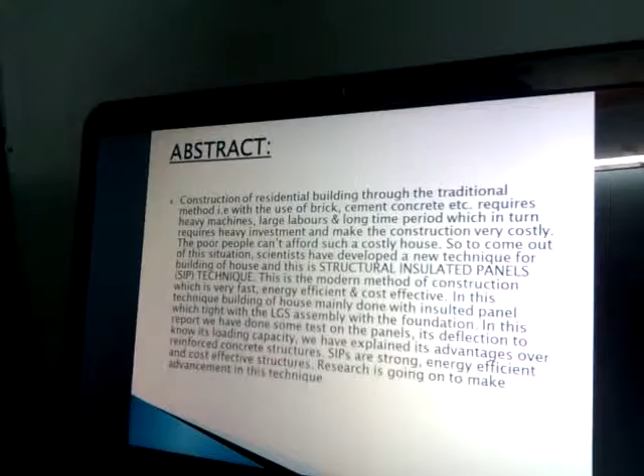This is the abstract. Construction of residential buildings using the traditional method with brick, cement, concrete, etc. requires heavy machines, large labor, and a long time period, which in turn requires heavy investment and makes construction very costly. Poor people can't afford such costly houses, but rich people can. For the betterment of this situation, there is a new technique, the Structural Insulated Panel System, which is very fast, energy efficient, and cost effective.

In this technique, the building of a house is mainly done with insulated panels, tied with an LGS assembly to the foundations. In this report, we have done some tests on the panels and their deflections to know their loading capacity. We have also explained its advantages over reinforced concrete structures. SIPs are strong, energy efficient, and cost effective structures. Research is going on to make advancements in this technique.

This is the company profile. Composite Technology Park is situated in Bangalore. It is a society for developing composites, incorporated in 2003 as a registered R&D society, supported by the Department of Science and Technology, Building Materials and Promotion Councils, Department of Housing, Coir Board, Government of India. This also includes construction of a structural insulated panels house.

This company is run under the Executive Director, Dr. R. Gopalan, who is Company Executive Director and CEO.

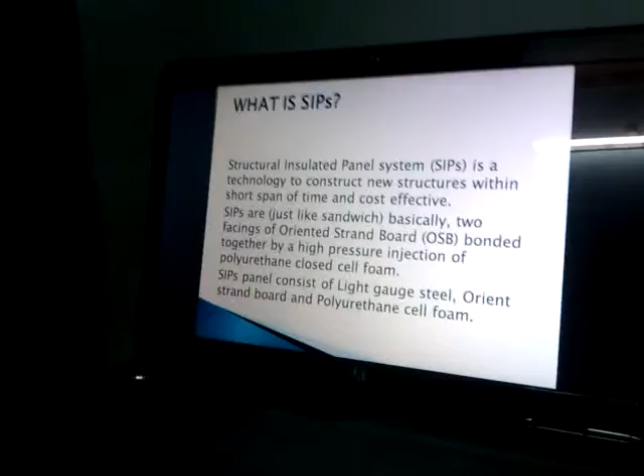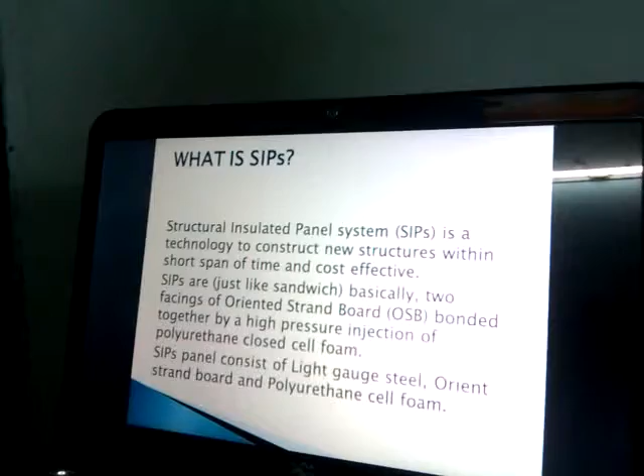First of all, let's know what SIP is. SIP is nothing but Structural Insulated Panel System. It is a technology to construct new structures within a short span of time and cost effectively. SIP basically consists of two facings of oriented strand board bonded together by a high pressure injection of polyurethane closed cell foam. It also consists of light gauge steel, oriented strand board, and polyurethane cell foam.

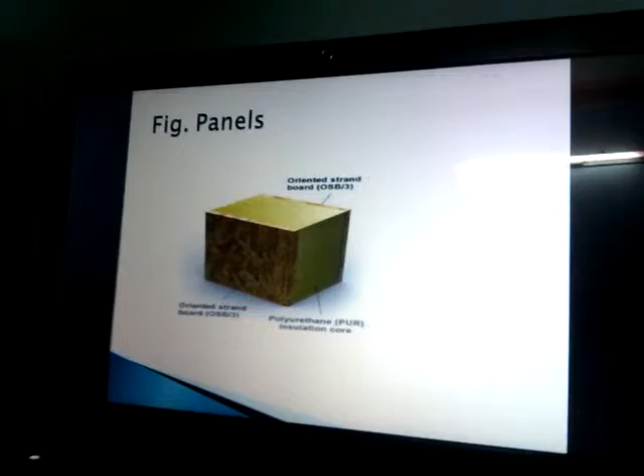You are viewing these diagrams of the structural insulated panel system. This is the panel, this is the OSB board, this is the PUR foam, and this is bonded together by an adhesive.

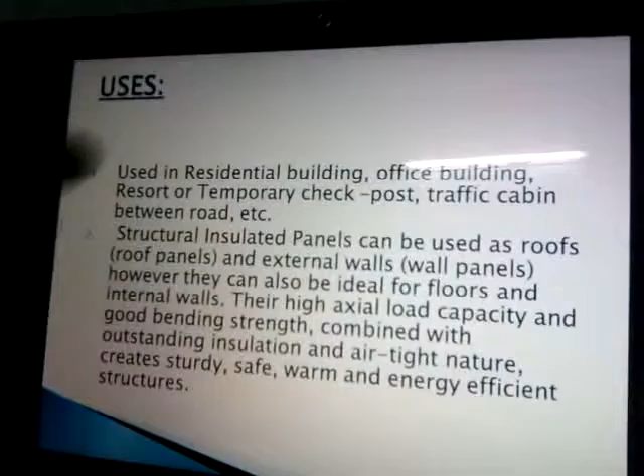Its usage is in residential buildings, office buildings, resorts, temporary checkposts, or traffic cabins between roads, etc. It is mainly used as roof and external walls. However, it can also be ideal for floors and internal walls.

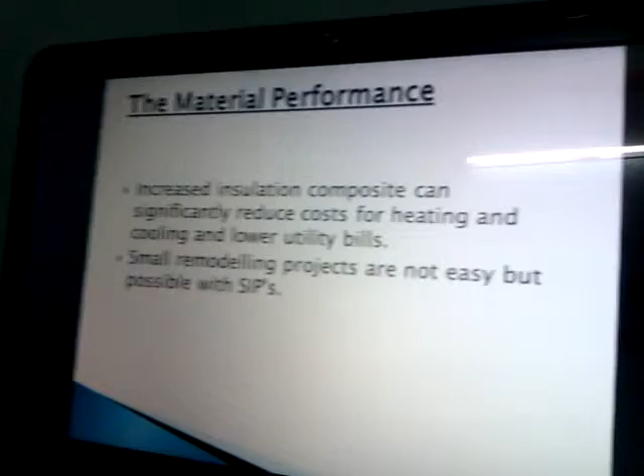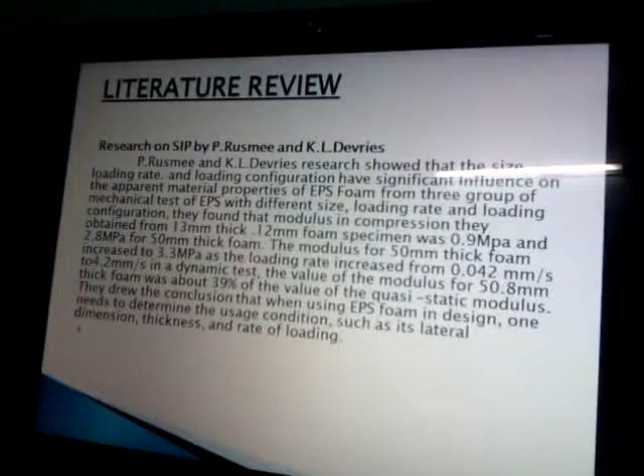Structural insulated panel materials performance: increased insulation composite can significantly reduce costs for heating and cooling and lower utility bills. This is from the literature review research given by P. Rusmee and K.L. Devries.

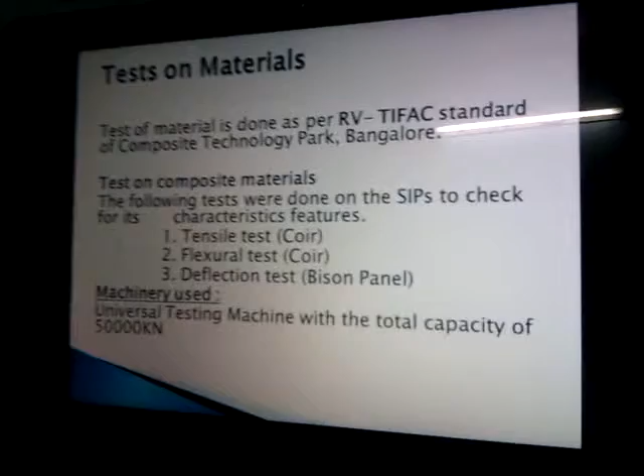Test of material is done as per RV-TIFAC standard of Composite Technology Park, Bangalore. The following tests were conducted on the SIPs to check its characteristic features, such as tensile tests, flexural test, and deflection test of Bison panels.

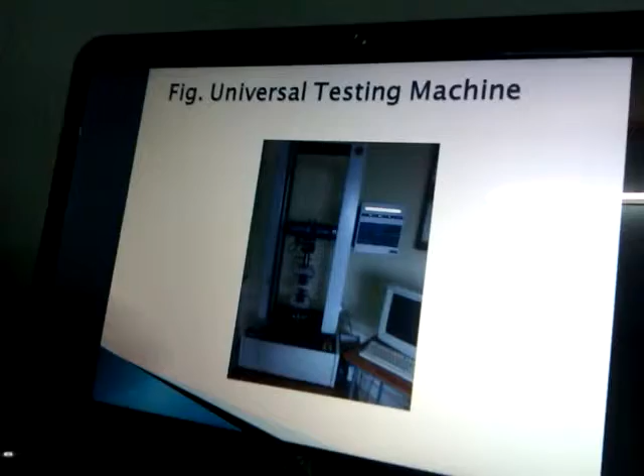We have used a universal testing machine with a total capacity of 50,000 kilonewton. You are viewing this universal testing machine. With the help of this, we can check the compressive strength, tensile strength, and flexural strength.

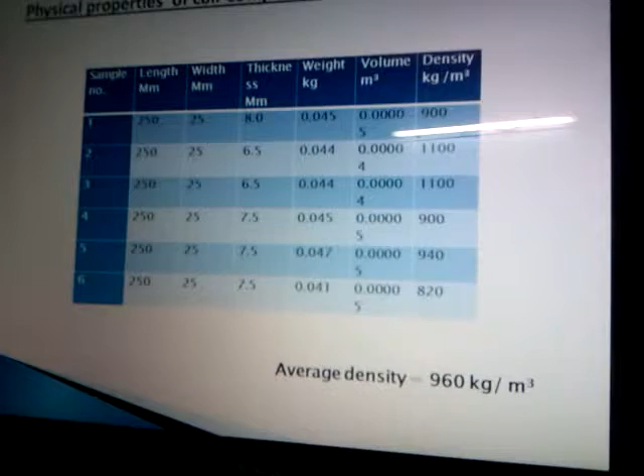We calculated physical properties of coir composite laminates of thickness 8 mm, and we got that the average density is 960 kg per meter cube.

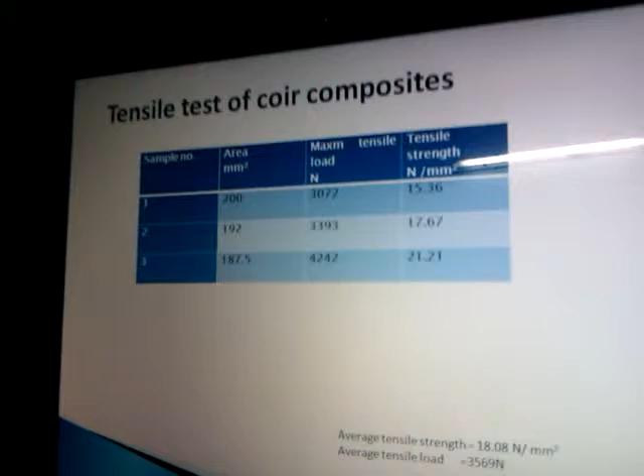For the same material, we have done a tensile test of coir composites, and we found that the average tensile strength is equal to 18.08 Newton per mm square, and it can resist a maximum tensile load equal to 3,569 Newton.

Second, we have done a flexural test of coir composite laminates of 8 mm, and we got an average flexural strength equal to 1.7 Newton per mm square, and it can resist a maximum flexural load equal to 1086.4 Newton.

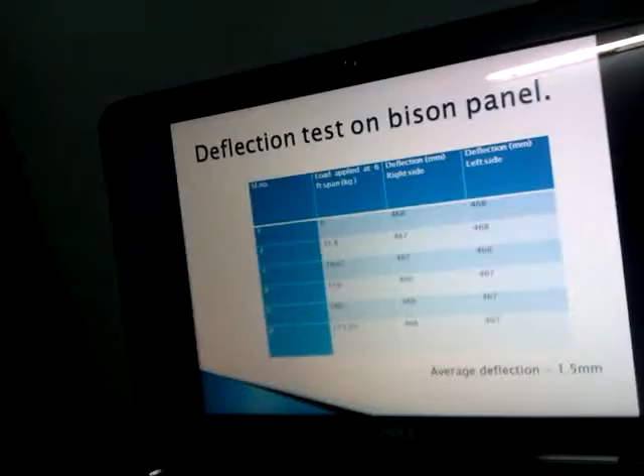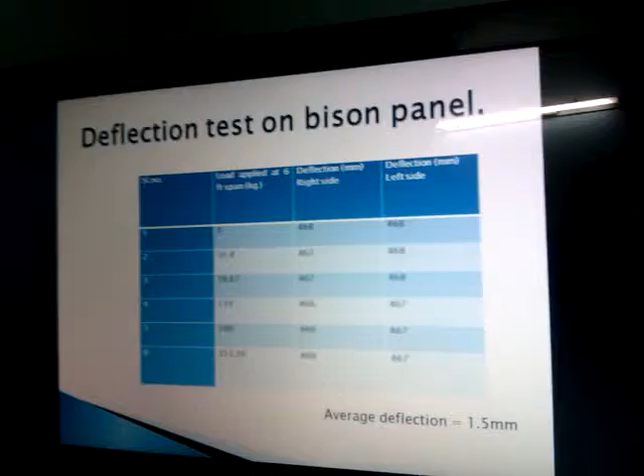Third, deflection test on bison panel. We have done a deflection test on the bison panels to check its deflection, and we got deflection equal to 1.5 mm by putting a total load equal to 213.2 kg. We have done the deflection test on both right side and left side, and we got that the total deflection is equal to 1.5 mm. Next, we have done a case study on the construction of the SIP house.

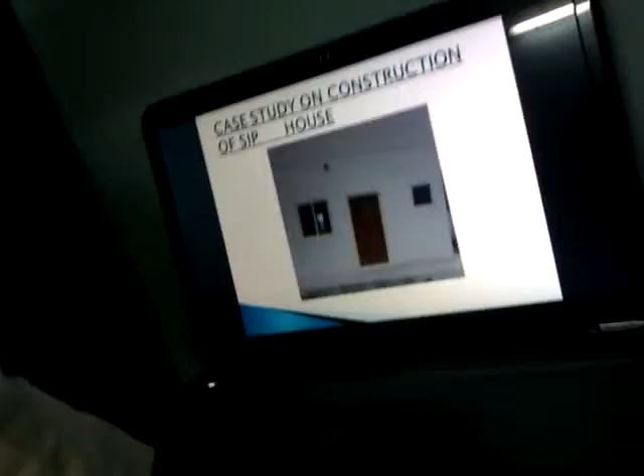This is the front view of the structural insulated panels house which we have done a case study on. This is the detailed dimension of the house. The total size of the house is 4.7 meter by 5.5 meter.

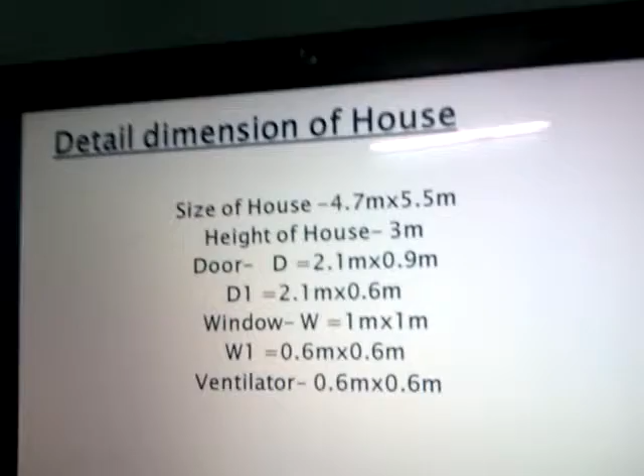Height of the house is 3 meters. Door D is 2.1 meter by 0.9 meter, and D1 is 2.1 meter by 0.6 meter. Window is 1 meter by 1 meter, and W1 is 0.6 meter by 0.6 meter. Ventilator is 0.6 meter by 0.6 meter.

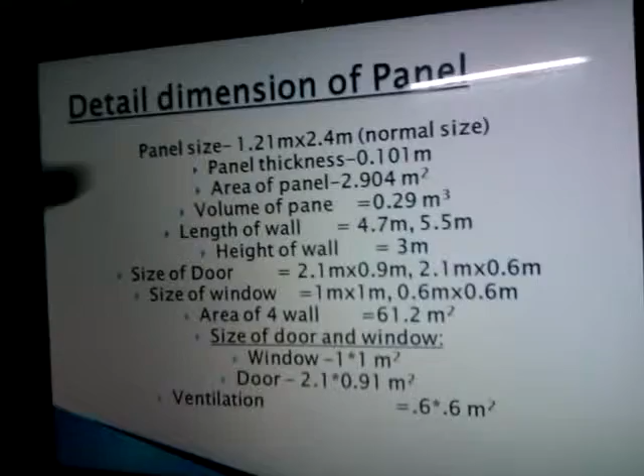This is the detailed dimension of panels which we are going to fit around above the plinth level. The panel size is 1.21 meter into 2.4 meter. This is the size normally used for construction of residential buildings when using structural insulated panel technology. Panel thickness is 0.101 meter, and area of the panel is 2.904 meter square.

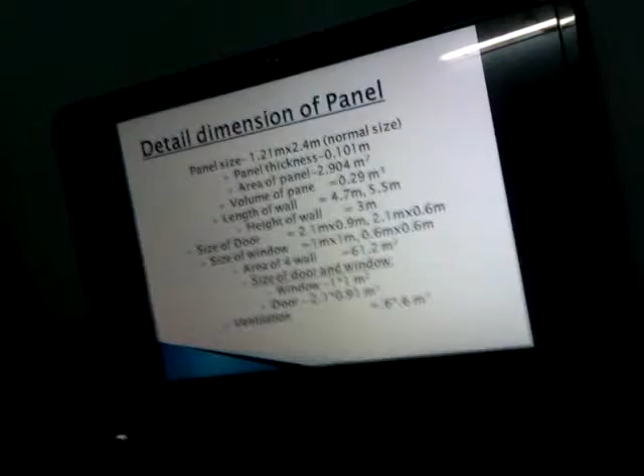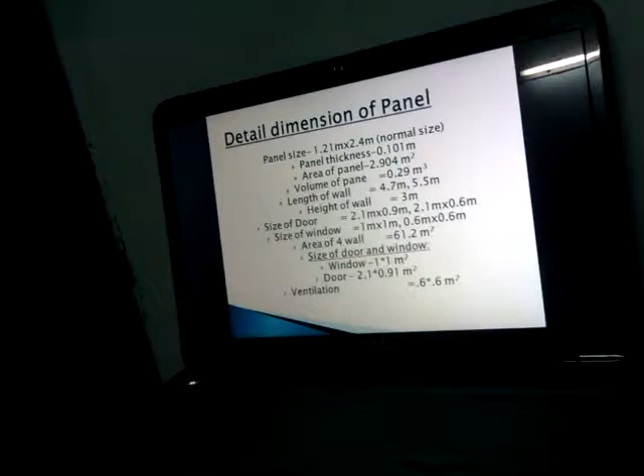Volume of panel is equal to 0.29 meter cube. Length of the wall is 4.7 meter, height of the wall is 3 meter. Size of the door is 2.1 into 0.9 and 2.1 into 0.6. Size of the window is 1 into 1, and another one is 0.6 into 0.6 meter. Total area of the wall is equal to 61.2 meter square.

Size of the door and window, next one: window is 1 into 1 meter square. Door is 2.1 into 0.91 meter square, and for ventilation same, 0.6 into 0.6 meter square.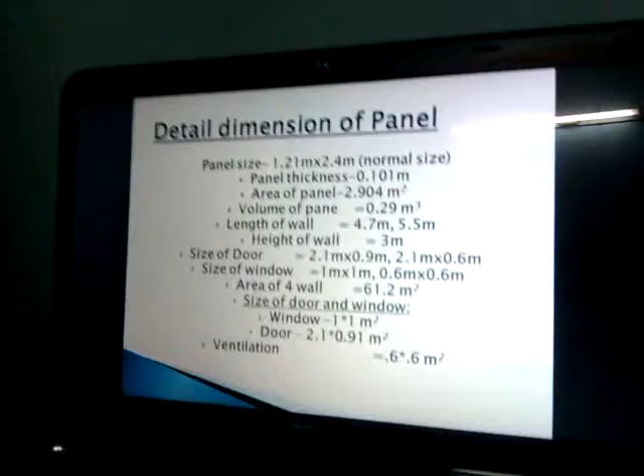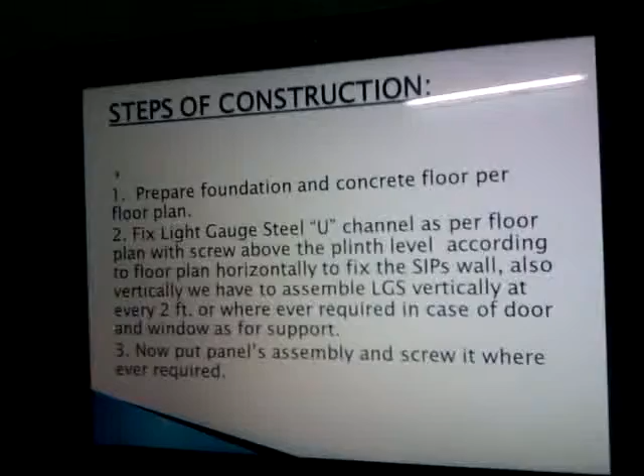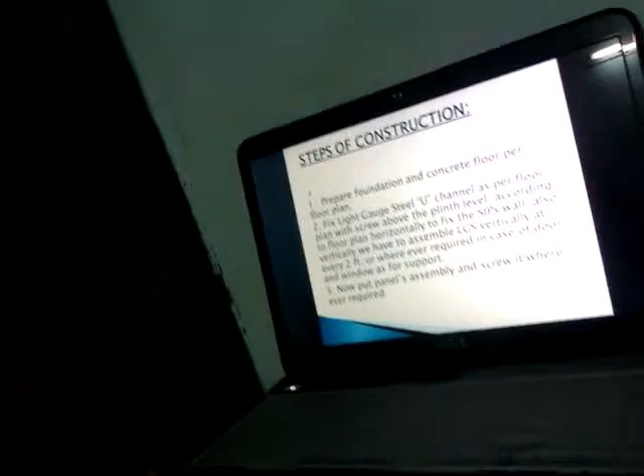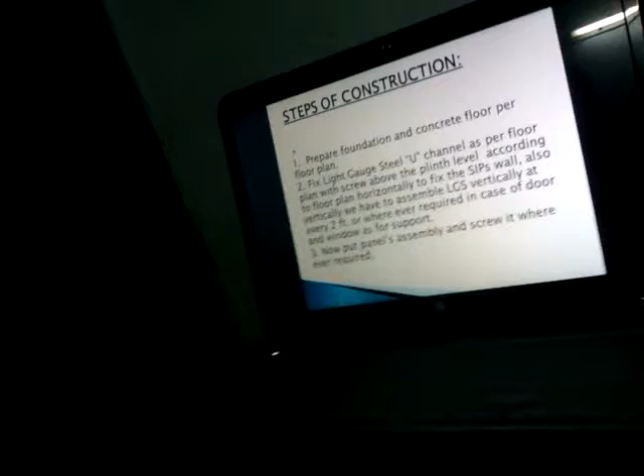Steps of construction: how we are going to construct the residential building with the help of structural insulated panel technology system. First we have to prepare the foundation and concrete floor as per the floor plan. Then we have to fix light gauge steel U channel as per the floor plan with screws above the plinth level, horizontally to fix the SIP wall. Also vertically we have to assemble LGS at every 2 feet or wherever required in case of door and window, as support. Now we put the assemblies and screw them wherever required.

This is the floor plan of the SIP house. This one is living room, this one bathroom, this one passage, this one bedroom, and this one kitchen. It has common thickness of 0.101 meter for panels, and the panel used has the same thickness of 0.101 meter.

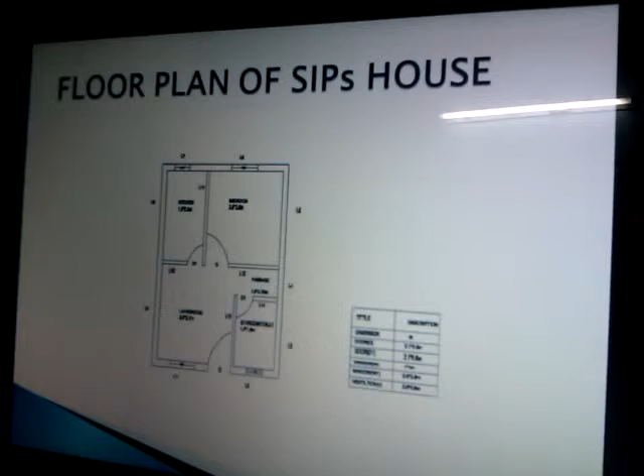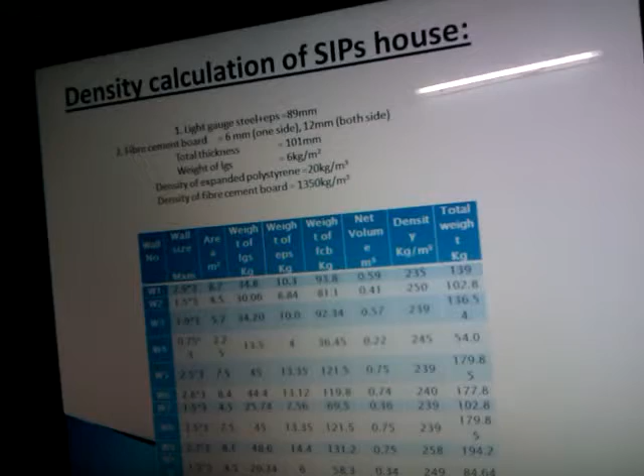This is the density calculation of the SIP house. We have calculated the density for the SIP house, and the material used for making the panels for construction of the SIP house is light gauge steel with fiber cement board.

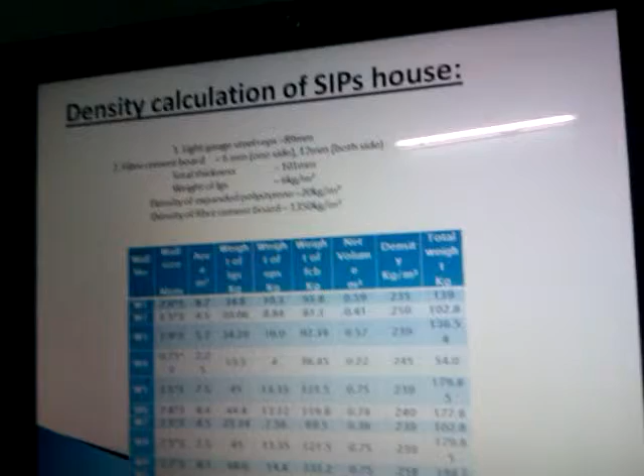Its dimension is: light gauge steel plus EPS equals 89 mm. Fiber cement board is 6 mm for one side and 12 mm for both sides, and total thickness is 0.101 meter. Weight of LGS is 6 kg per meter square. Density of EPS is 20 kg per meter cube, and density of FCB is 1350 kg per meter cube.

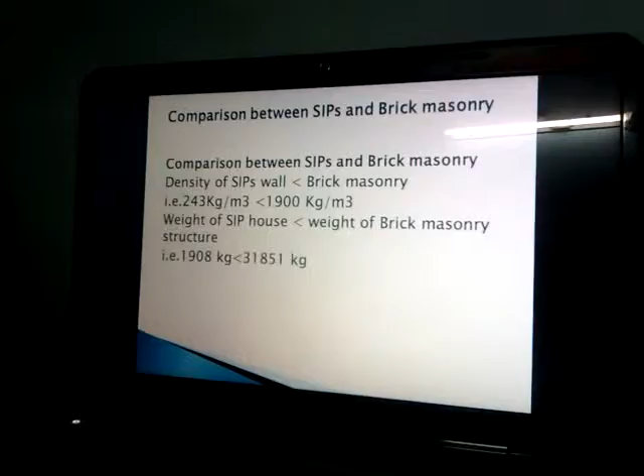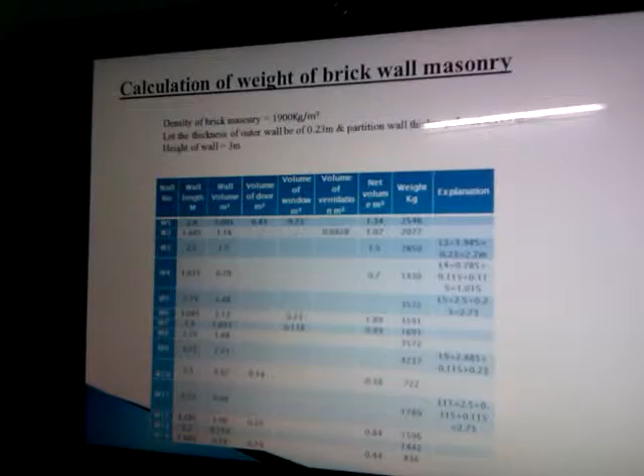This is the tabulation for all 14 walls we have calculated to find its density. For comparison purposes, we have also calculated the weight for brick wall masonry. Density of brick masonry is 1900 kg per meter cube. We have taken the thickness for the outer wall of the brick masonry structure as 0.23 meter, and the partition wall (internal wall) thickness as 0.115 meter. This is the tabulation and calculation for all 14 walls for the same brick masonry structure.

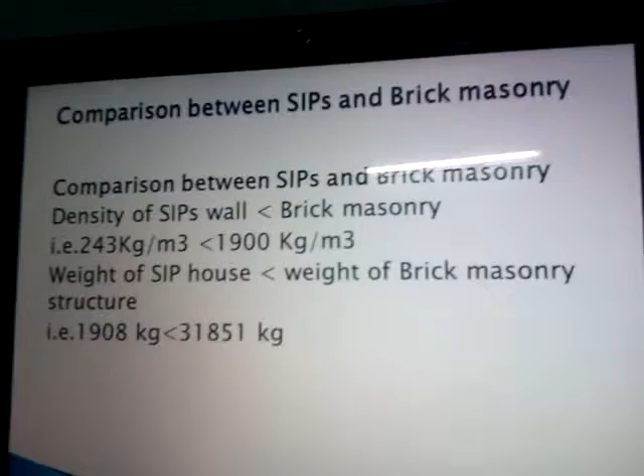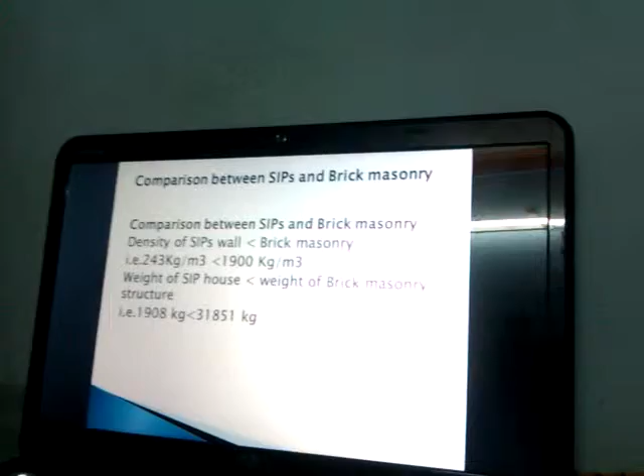Now we are comparing SIP and brick masonry structures. Density of SIP wall is smaller than brick masonry, that is 243 kg per meter cube compared to 1900 kg per meter cube. For the same, weight of SIP house is smaller than the weight of brick masonry structure. The weight of SIP house is 1908 kg, while weight of brick masonry structure is 31,851 kg. We concluded that in both cases SIP is better than brick masonry structures.

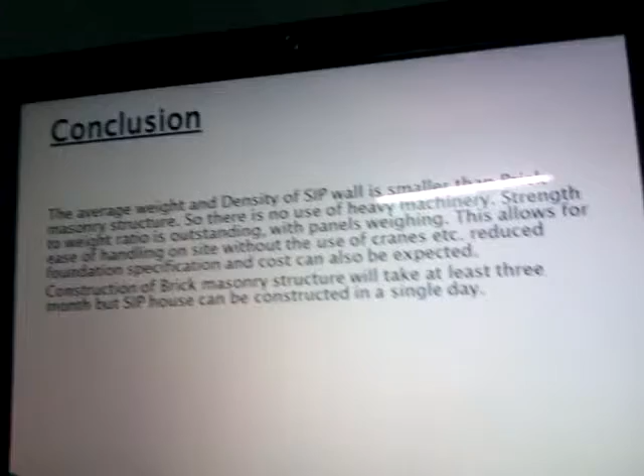The density of SIP wall and brick masonry is 243 kg per meter cube and 1900 kg per meter cube respectively. In conclusion, we concluded that the average weight and density of SIP wall is smaller than brick masonry structure, so there is no use of heavy machinery. Strength to weight ratio is outstanding with panels weighing. This allows for ease of handling on site without the use of a crane, etc. Reduced foundation specification and cost can also be expected.

Construction of a brick masonry structure will take at least 3 months, but SIP can be constructed in a single day.